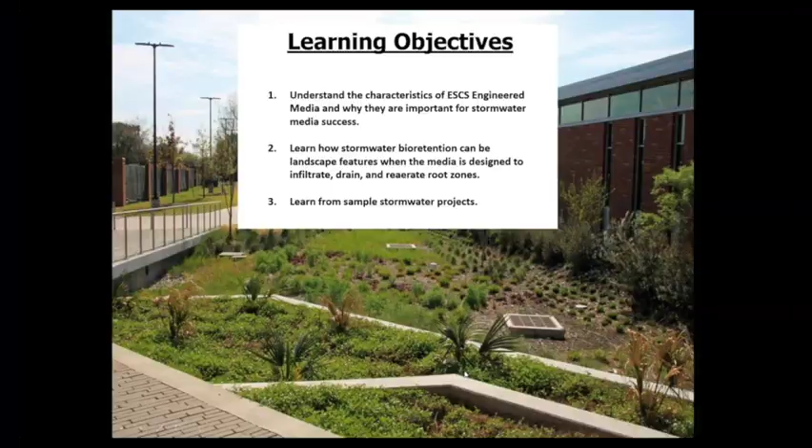The EPA is promoting green infrastructure as a cost-effective, resilient approach to managing wet weather impacts that provide many community benefits. While single-purpose gray stormwater infrastructure is designed to move urban stormwater away from the built environment, green infrastructure reduces and treats the stormwater at its source while delivering environmental, social, and economic benefits.

Stormwater is a major cause of water pollution in urban areas. When rain falls on our roofs, streets, and parking areas, the water doesn't soak in as it should. Stormwater drains through gutters, storm sewers, and other engineered collection systems and is discharged into nearby water bodies. The stormwater runoff carries trash, bacteria, heavy metals, and a litany of other pollutants.

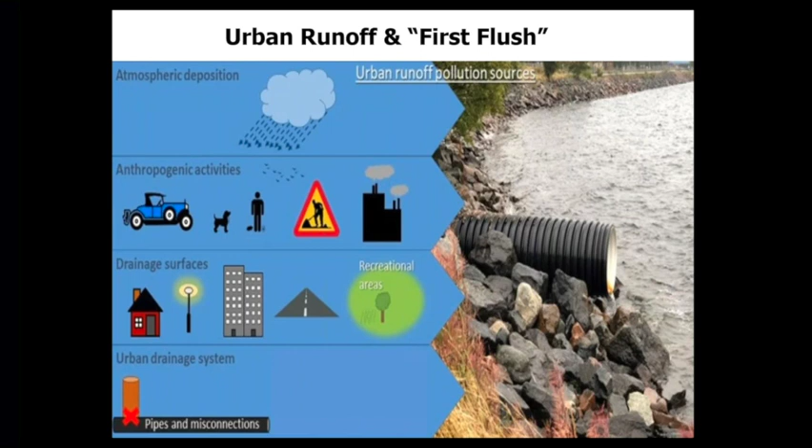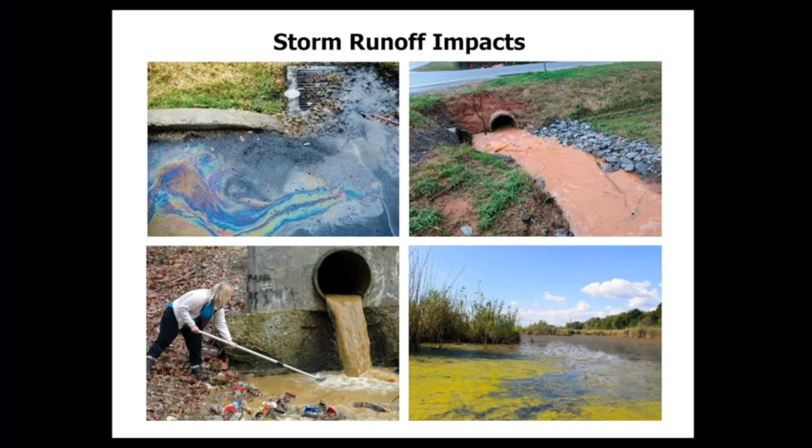Also, higher flows resulting from heavy rains can cause erosion and flooding in urban streams, which can damage the habitat, property, or even the infrastructure itself. So green infrastructure uses vegetation, soils, and other elements and practices to manage water and create healthier urban environments.

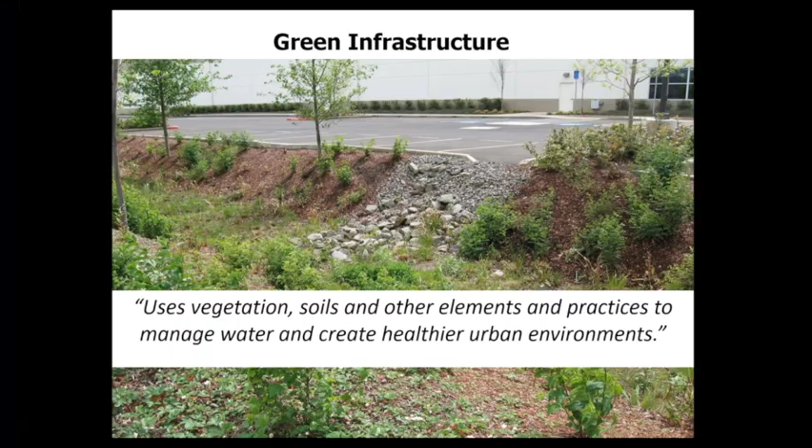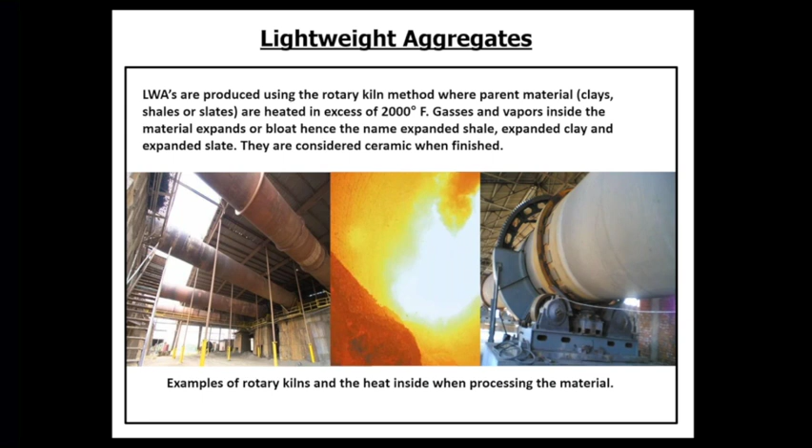Lightweight aggregates are produced using the rotary kiln method, where clay, shale, and slate are heated at high temperatures. At those temperatures, gases and vapors inside the material cause it to expand or bloat, hence the name expanded shale, clay, or slate. You can see from the pictures a couple of examples of the rotary kilns used in the process, as well as a look inside the kiln when the material is red hot and heated.

The common gradations for the lightweight ESCS material are fines, which include the different sand sizes, the 3/8 or pea gravel sized material, and 3/4 inch coarse or gravel sized material. Other material sizes are available depending on the location and the manufacturer.

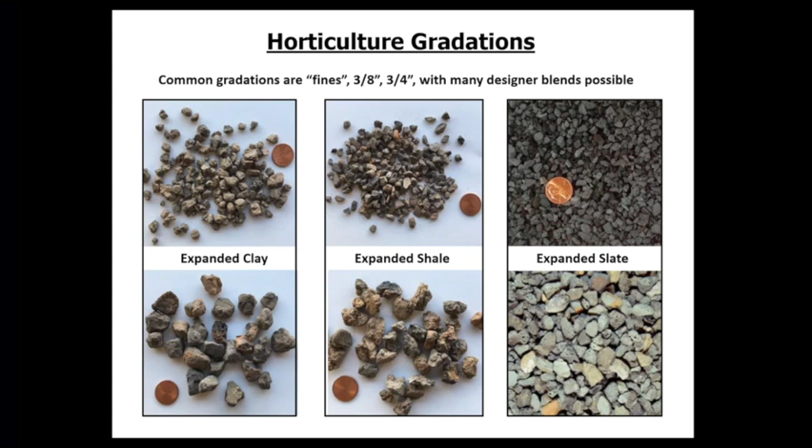As we look at the total manufacturing process, you can see that essentially the raw material is mined, sized to be fed into the kiln, heated at high temperatures, cooled, screened and sized to industry specifications, and then shipped to customers and projects throughout the country.

You can also look at the heating process from the fuel source, airflow through the kiln, and the air quality control that's in place to meet air quality standards. This entire process is constantly monitored and tightly controlled to ensure quality and consistency.

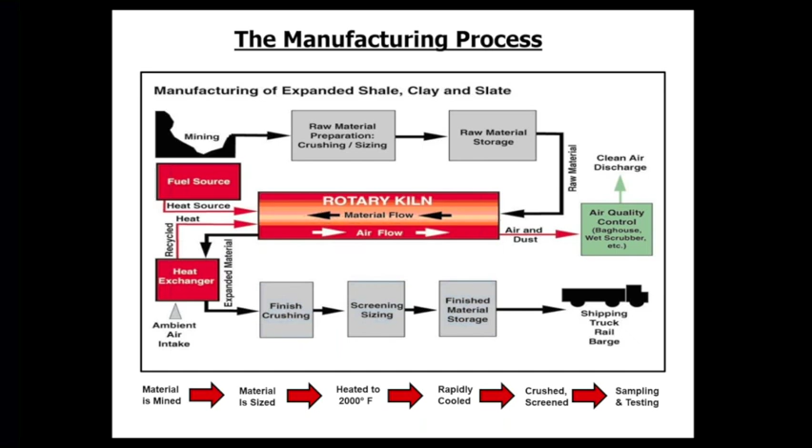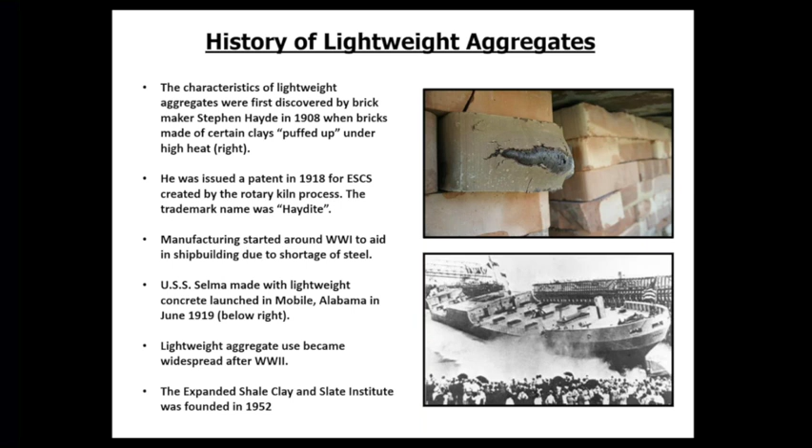Lightweight aggregate use became widespread after World War II, and the Expanded Shale, Clay, and Slate Institute was founded in 1952.

Here's a couple of illustrations of early uses of lightweight expanded shale, clay, and slate in concrete-related applications. This is a World War II concrete ship passing under the Oakland Bay Bridge. Both the ship and the bridge had lightweight concrete.

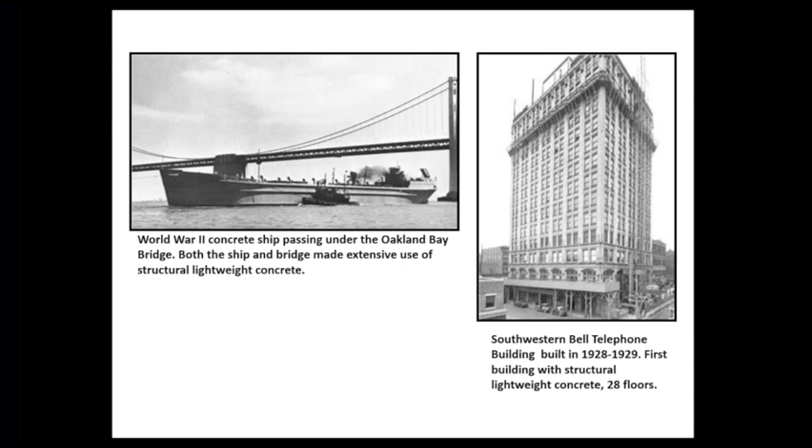On the right is the Southwestern Bell telephone building built in 1928. The first building with structural lightweight concrete, which consisted of 28 floors.

Today, lightweight expanded shale aggregate ESCS materials are available throughout the United States, with producers being able to service the entire United States as well as into Canada.

Lightweight ESCS material is all around us, from the roads that we drive on through construction and maintenance of those roads, as well as geotechnical fields, sports fields and other parks, horticulture, hydroponics, aquaponics. It's all around us in our structural lightweight concrete high-rise buildings and bridge decks, lightweight block, other masonry units, stone veneers, and a litany of other applications, including stormwater, as we're addressing today.

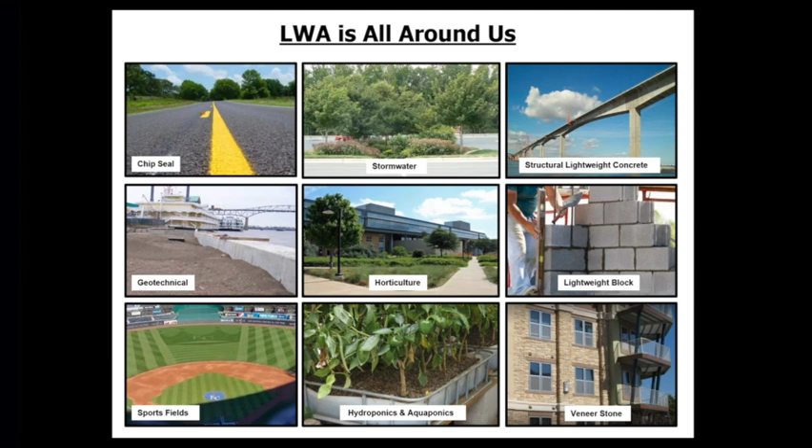Some of the benefits of the material with regards to stormwater: one key thing is it's light in weight, about half the weight of normal rock, sand, or topsoil. It's porous, which is important to add porosity to the soil, helps balance the air and water in the soil profile. It's also important for the microbial activity it helps promote and sustain with the management of stormwater and treatment. It's structurally stable and strong.

The angular particles will interlock. The gradation is set such that it won't break down. It doesn't degrade—even in harsh weather conditions, it's going to remain intact. The material can absorb and desorb nutrients and water as plants need them. It can be very high draining, and those drainage rates can be adjusted to meet the needs of a project or a stormwater application.

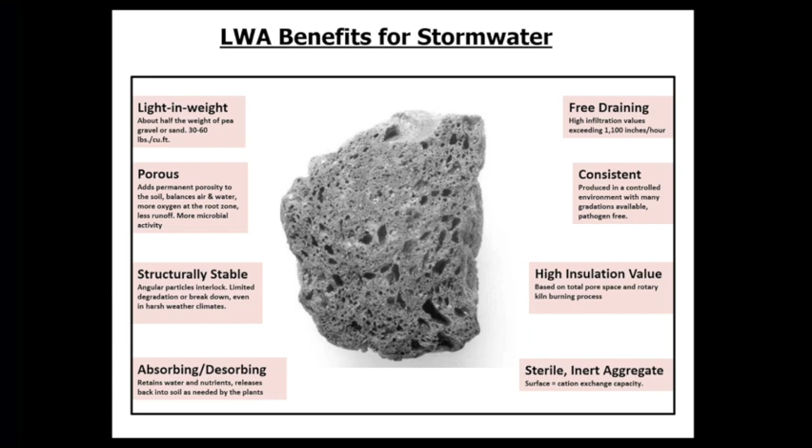Most importantly, as we mentioned in the production process, it's consistent, produced in a controlled environment, pathogen-free, weed-free, and clean. It also gives us a high insulation value, which is important in moderating soil temperatures and maintaining the porosity of the material itself. Finally, it's sterile and inert—weed-free, chemical-free—and it has a high cation exchange capacity, meaning it'll be very beneficial in exchanging ions in the soil and holding on to nutrients.

This is a close-up of the porosity of the particle on the material. You can see the network of pores throughout, which is important for the absorption and desorption of water and nutrients, and also to maintain beneficial microbial activity and provide a place for those microbes to live. This illustration shows the higher porosity associated with ESCS materials as compared to traditional aggregates that have a lot less porosity.

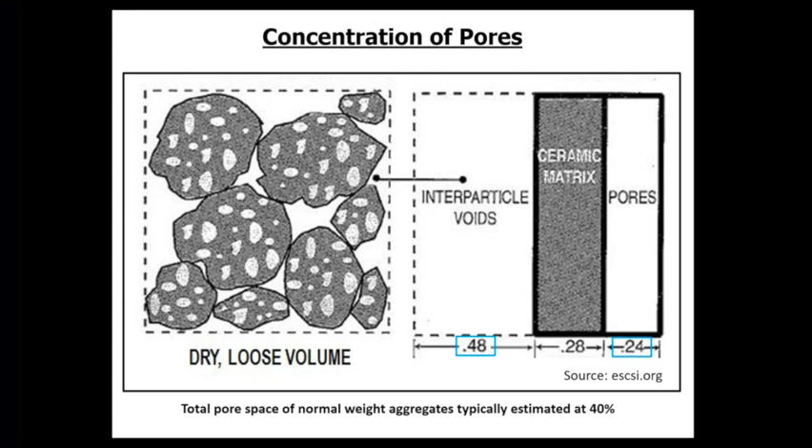So why do the materials work? They have a long history—they've proven themselves in use in rooftop gardens for many years now, which are some of the harshest environments and intense projects where it can be used. They hold on to moisture and nutrients and absorb and desorb those nutrients as needed by the plants. They hold water longer than sand and provide soil temperature moderation, which can be important in areas of high heat or extreme cold temperatures.

And with that, I'm going to turn it over to Eric Nelson with Arcosa, who is going to go over some additional properties as well as get into a couple of projects using these materials.

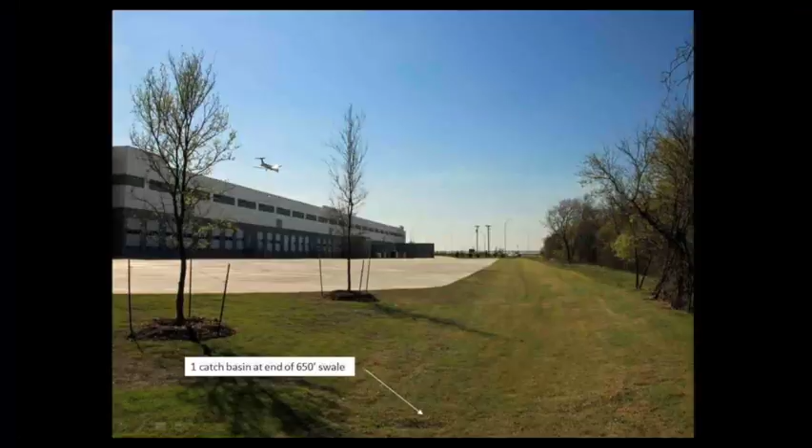So starting off, basically what we learned in soil science class: we have three different particle sizes, beginning with sand, silt, and clay. Sand is the largest of all particles. It drains very well, it does not compact, and it holds water, but not for a very long time.

On the extreme end, you have clay, which is a detriment to stormwater because it compacts very easily. There's a lot of surface runoff, very low permeability. The good thing about clay is it does hold water for a long period of time. It also dries out very fast and cakes up.

So if you were looking at expanded shale, clay, or slate in comparison to sand or clay, it basically falls in the middle. It drains very fast, high permeability, and holds water longer than sand. There's a lot of void spaces for the water to penetrate, and it does not compact.

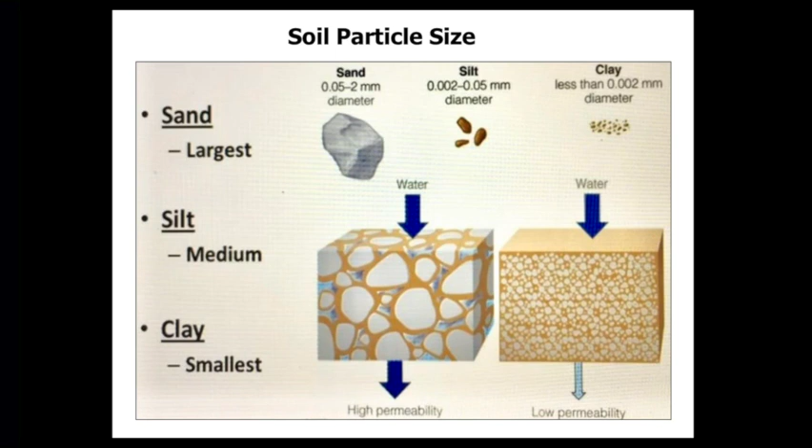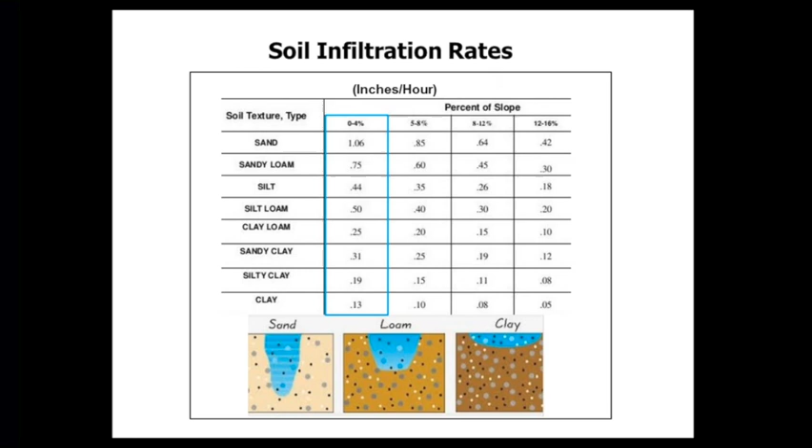Looking at this table, sand drains at over 1 inch an hour. At the lower extreme, you have clay, which drains at a little over 1/10 of an inch an hour. From the diagrams below, you can see sand is basically a vertical column of water penetrating the soil. Loam is evenly distributed, and clay basically sits at that top layer, spreads out, and evaporates pretty quickly into the atmosphere.

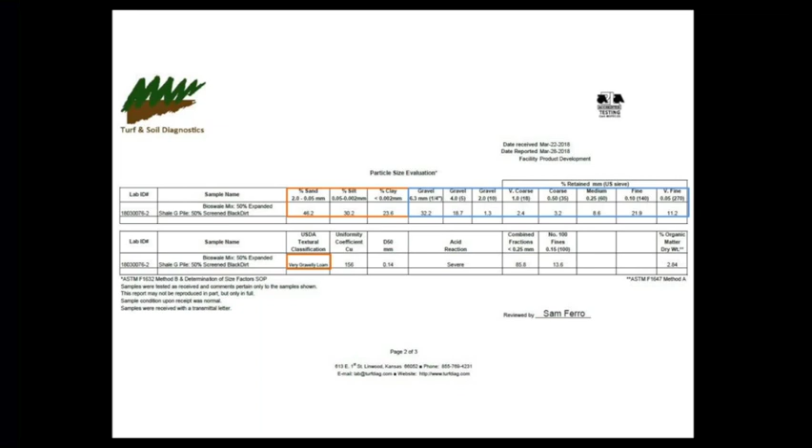The infiltration rate of that was 24.8 inches an hour, compacted to 5.75 foot-pounds per square inch. If you wanted to modify that to get a higher flow or reduce flow, it's a simple equation of using more lightweight or a finer gradation of lightweight in conjunction with sand or compost.

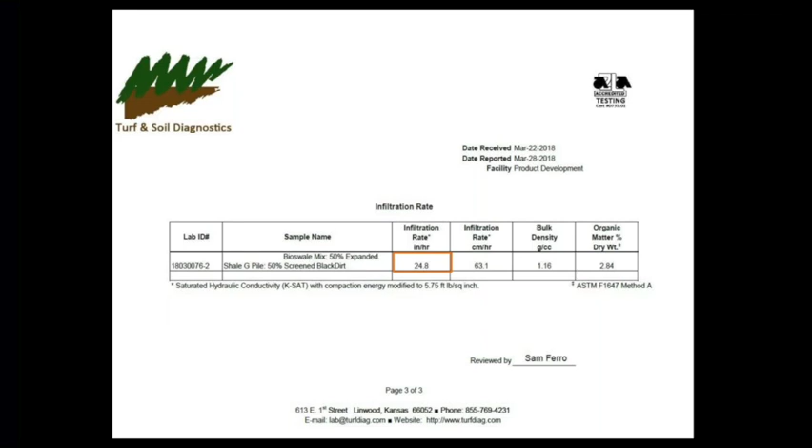Basically, we look to mimic forest soils where they have more avenues for air and water. Urban soils are easily compacted from pedestrian foot traffic, machine compaction. There's a history of construction debris underground. It really limits the air and water infiltration into the soil.

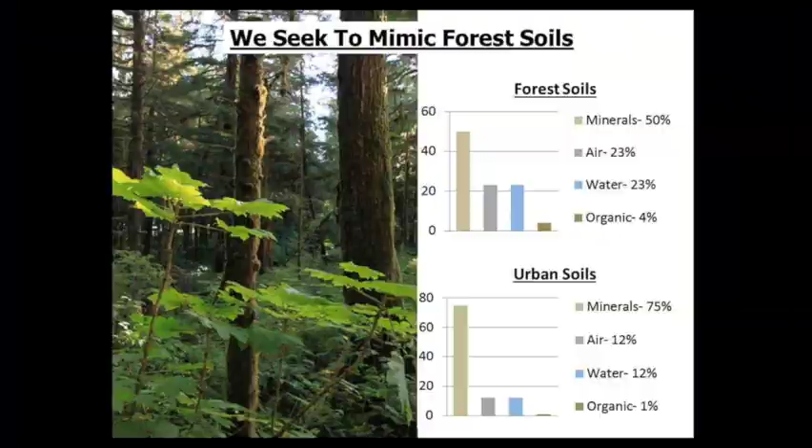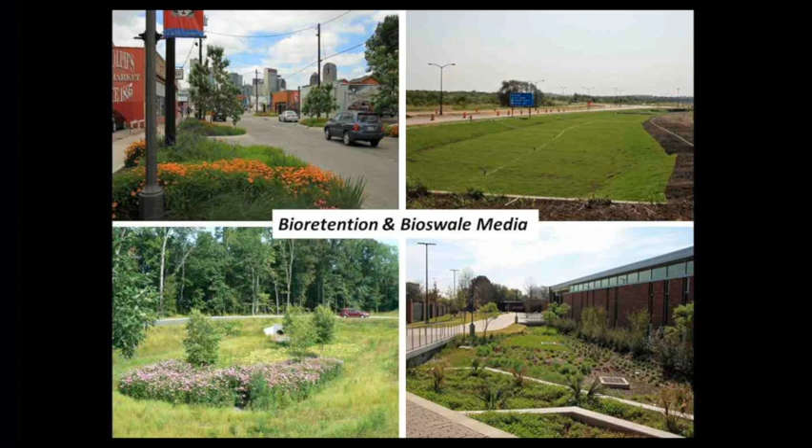So in stormwater, we have basically bioretention and bioswale media. I'm going to talk about 6 projects that are in the DFW and Austin areas.

The first one here is the Green at College Park, University of Texas at Arlington. This was one of the first sites certified by the Sustainable Sites Initiative in 2012. It occupies 2.6 acres, including a gathering plaza, activity lawn, promenade, and water detention system, which is the main attraction for this site. It reduces stormwater runoff by 25% and filters 80% of the suspended solids.

You could see there the bioretention media design: 1 part compost, 1 part expanded shale, 1 part native soil, and 2 parts sand.

Looking at the overhead plan here, you start on the north side, the left side of the screen, where they designed a bioretention swale that runs along to this point, where it enters a filtration zone with horsetail reeds running along the avenue. It's basically 6 foot wide and 3.5 foot deep. It enters a bioretention system at this point.

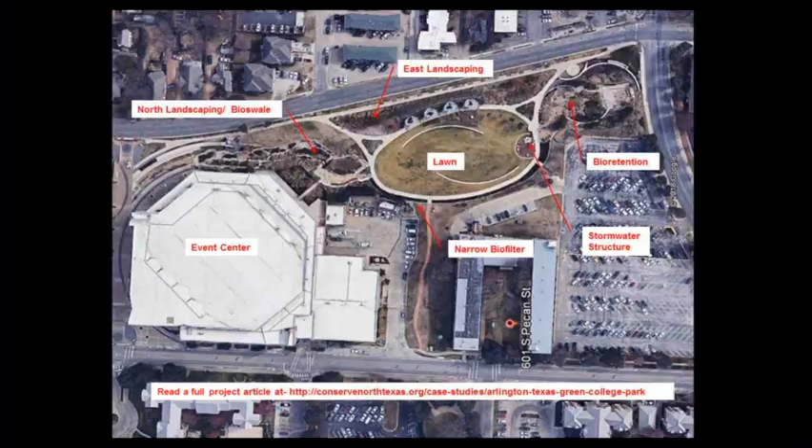So water is coming out of that structure in a big rain event. This is really unique because you're basically taking water out of a drainage system, reducing the runoff, delaying input into the drainage system, and improving water quality as it backs up under the lawn, the bioretention cell.

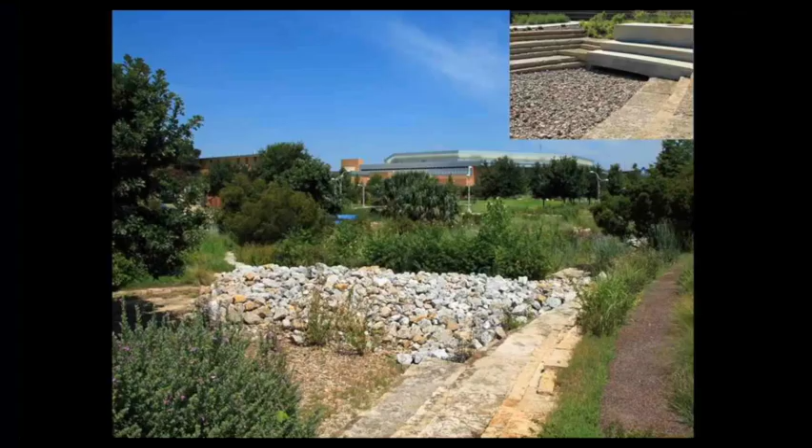Here's a check dam on the lower southern end. The water does back up about 2.5 feet in the bioretention cell in a big rain event, but before it enters the drainage system as shown in the upper right-hand corner.

The problem they were having with this project was runoff from the uplands residential area. There were 3 culverts underneath the road parkway in 3 separate spots. So you had a lot of nitrogen and phosphorus runoff basically sheet flowing across the parkway into the Shoal Creek area, as identified in blue. What the designers did was use opportunities in the tree clearings to basically swale out some areas and create detention basins using expanded shale and compost tilled into the soil to slow that water down and catch it.

In between the 2 biocells, you have a series of check dams. There's a swale there, and again, the main purpose is to slow down that runoff and cleanse it on its way down before it enters the creek.

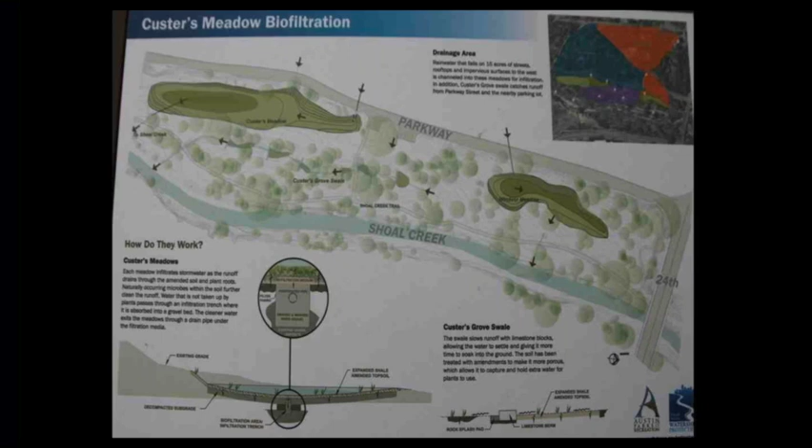Here shows some signage along the trail system, educating people about what they're doing along the project site. In the lower bottom of the slide, you can see where the water is allowed to pool into those areas. Again, because this is a passive park, nobody's using it at that point in time during a big rain event. But this does a good job of capturing the first flush of pollutants.

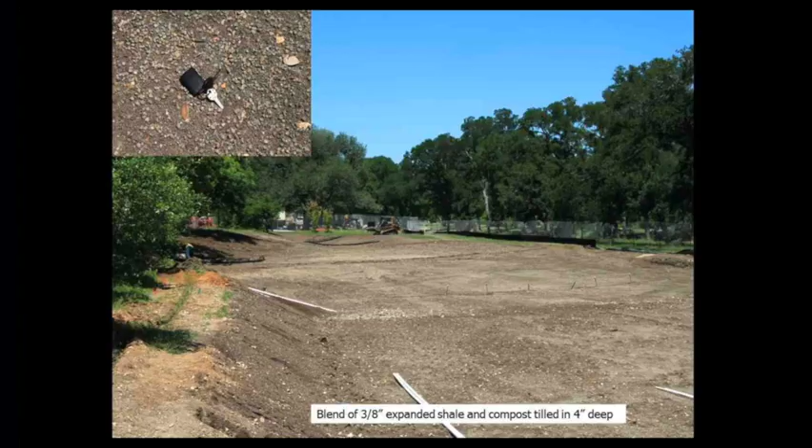Here you can see one of the areas. This was amended with 3/8 inch expanded shale and compost. Upper left-hand corner is a picture of the mix going in. They did use temporary irrigation to get the turf up. It didn't take very long because the moisture holding capacity of the lightweight aggregate and the compost did a good job of getting that turf up and running.

This was a project done southeast of Dallas along Deep Ellum. This happens to be an area with a lot of restaurants, bars, nightclubs, and shops. This is a multi-block beautification effort by a firm in Dallas, K. Cook and Associates. The design of this bioretention system was done by Dr. Fouad Jaber with Texas AgriLife.

Basically, this system is comprised of 50% plant-based compost, 25% expanded shale, 25% native soil. That tends to drain approximately 50 inches an hour. Beneath that, you have a 12-inch retention zone made up of pea gravel. So in a big rain event, you're getting good drainage through the detention filtration zone. It's allowed to back up into that pea gravel until it reaches that perforated pipe and goes out.

That bioretention mix will stay moist for a long period of time, especially at the lower zones of that, and it provides a deep rooting bed for trees and plants.

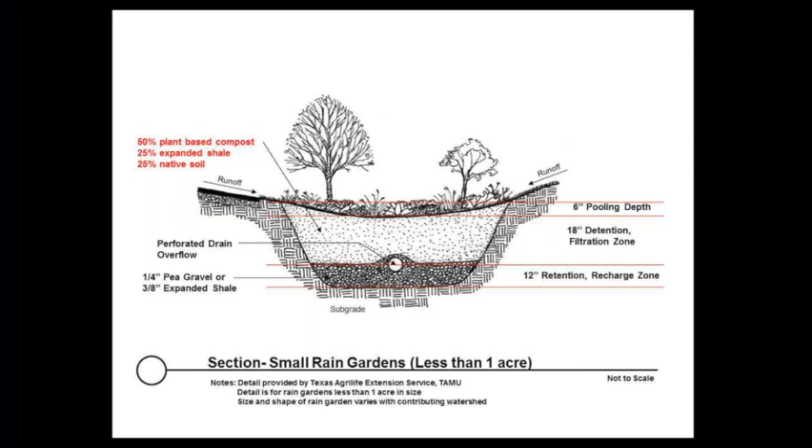Lindsay White, who was a landscape designer on the project, I have to give a shout out to her. She did an excellent job with a presentation online that you could access called Soils, LID, and LAs. It does a very good job of talking about the project and the process.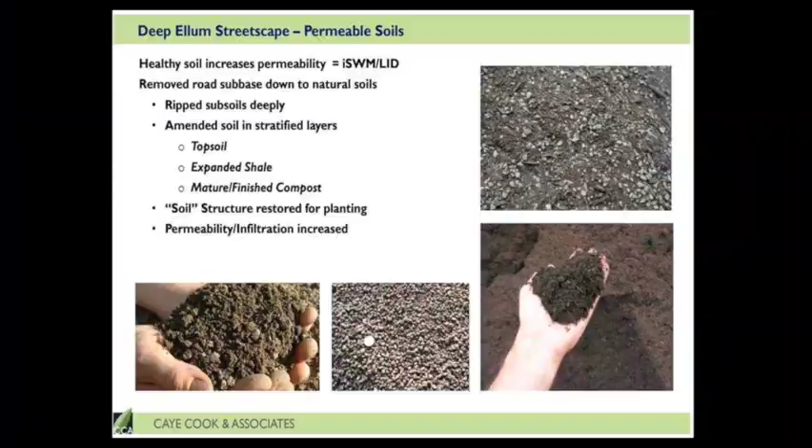So this is a project at DFW Airport Logistics Center. There's a lot of pavement on the project, a lot of sheet flow runoff. The designers on this chose to basically do a blend of 3/8 inch expanded shale and sandy clay. This was installed at a 6-inch depth. If you go back to your rational formula, you know that you're basically improving your coefficient of runoff with a higher permeability of this bioswale mix.

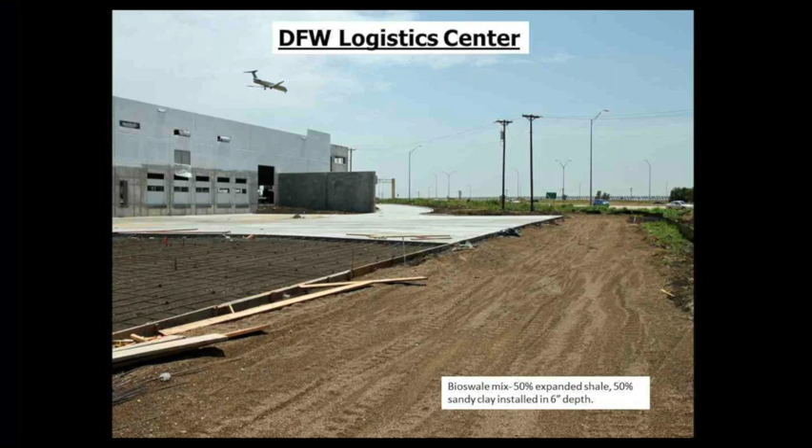This is something that could be blended on site as long as you have a clean work surface to do it. It's basically volumetric blending, 1 by 1. This is a shot finished afterwards.

This is basically a 650-foot long swale in one direction. It goes off to the left side of the screen here, another 200 foot. And as you can tell, there's only one catch basin that basically collects this water before it is drained to the outlet structure.

AT&T Stadium, this is a dual purpose use, overflow parking and also infiltration media. This was designed back in 2009. It's still up and running today, functioning very well. The designers on this were trying to protect Johnson Creek, which is off to the right side of the screen in blue. You can imagine all the greases, oils, hydrocarbons, and crumb rubber washing all over this expensive pavement. They had to do something to slow that down.

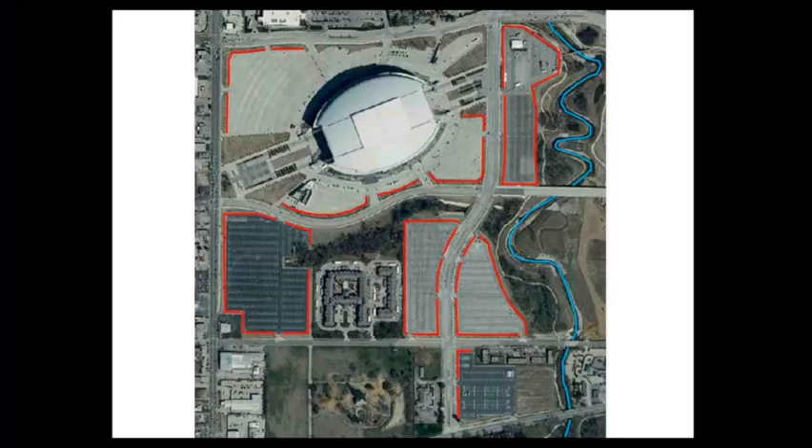These strips in red were basically 20 foot wide to allow for vehicle parking. The design of this included a prepared subgrade. There's a thin geogrid at the very bottom, a 6-inch infiltration media compacted. We like to see a sand backed grass sod on top because it doubles the infiltration rate over a clay backed sod.

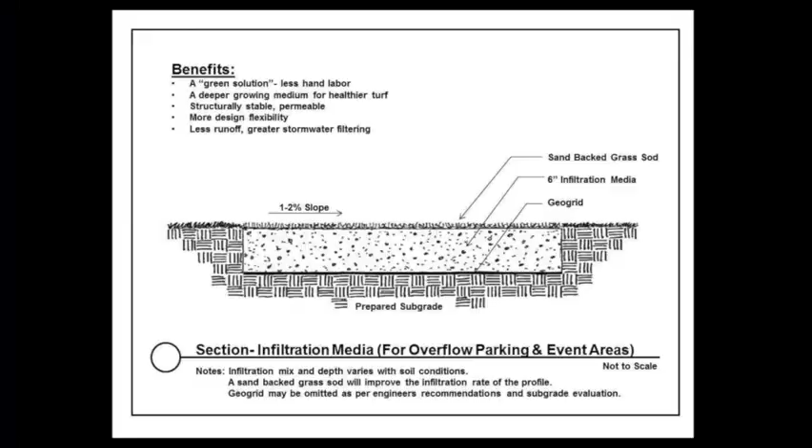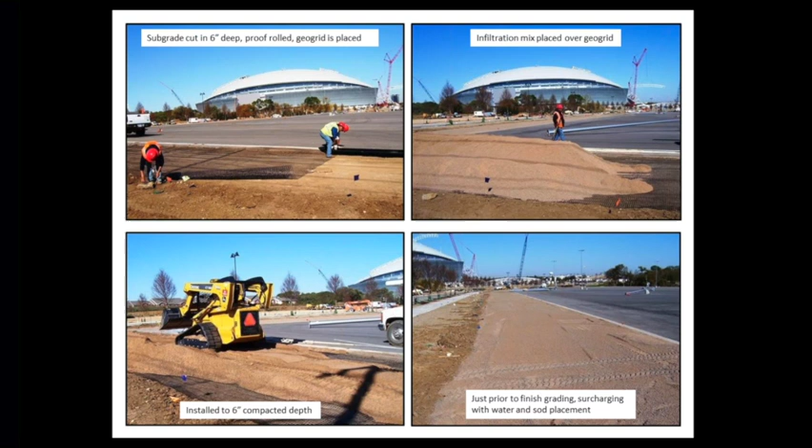Pretty simple installation. Here you can see it, work in progress. They roll out the geogrid, the mix is placed on top of it, it's tracked in place and compacted. Just prior to sodding, you want to charge that media fully with water. It's not done here in that slide, but that is an important step because of the quick drainage of this media.

You can tell it can take any type of vehicle parking on it. This mix was tested in the lab, basically 20.4 inches an hour, compacted at 7.5 pounds per square inch.

These parking areas during games or events get striped in paint, so you're paying for this spot. These green areas fill up quickest among all the parking areas on campus because people like to tailgate in grass where it's cooler, more comfortable.

They do have catch basins along some of these areas to trap water in big rain events, and they did have filters on it, catch basins, to further control the runoff before it entered that Johnson Creek system.

The last project I'll show you here is at DFW Airport. We've done a number of jobs there. As you know, airport grounds, some of the sites there, if they are holding water, they're going to be attractive to birds, and birds and wildlife do not go well with planes taking off.

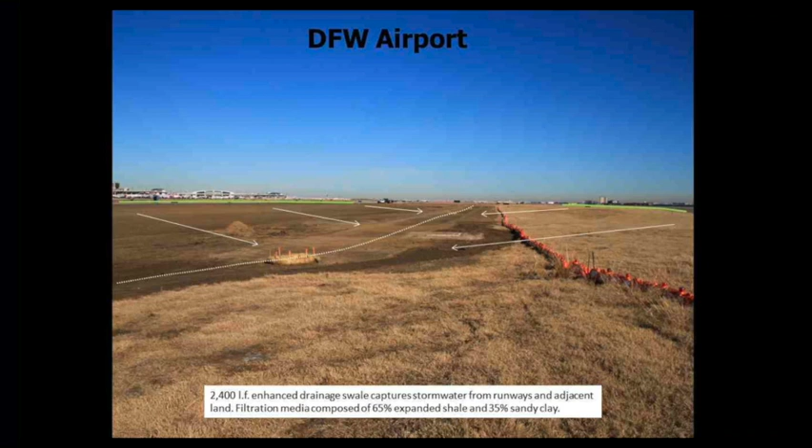This is an enhanced swale between two active runways where you're getting a lot of runoff from the adjacent areas. This is basically the same mix, 65% expanded shale, 35% sandy clay.

The architects here chose to use 6 inches of pea gravel wrapped in filter fabric, which sometimes I just see at the very bottom rather than on both sides of the pea gravel layer. There's 3 perforated pipes at the bottom, and there's 8 inches of this infiltration media.

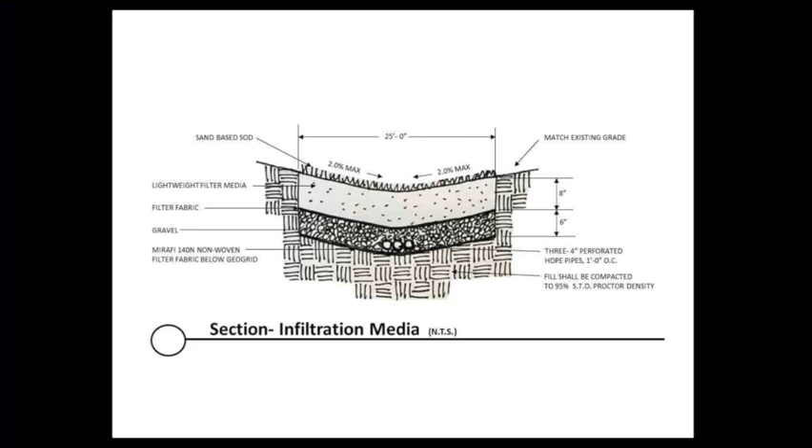We are actually going in some designs where we're using our finer gradation of expanded shale in that bottom layer, substituting that 8-inch layer of infiltration media with 4 inches of lightweight infiltration media, basically solving the same issue.

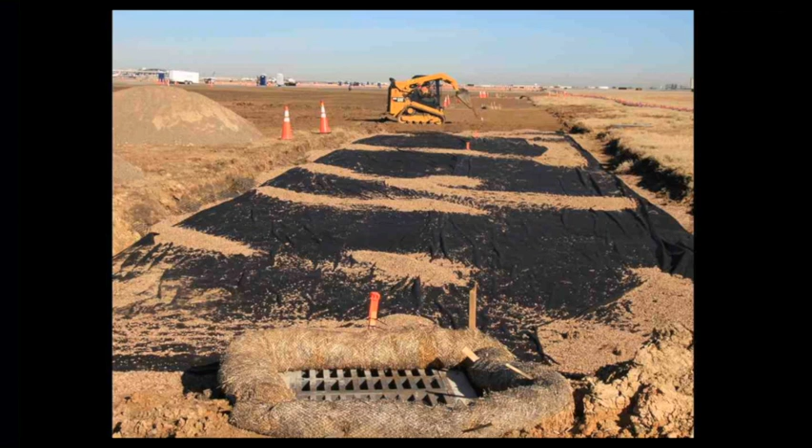This is a shot of it going in with the fabric on top of the pea gravel, the mounds of lightweight aggregate mix to the right. This is being placed in from the sides. Once that tractor is done, it's pretty well in place.

They do have catch basins on this, capturing runoff every about 400 foot. This media was placed as is, and you can tell the moisture in the media by the darker color where the swale is at.

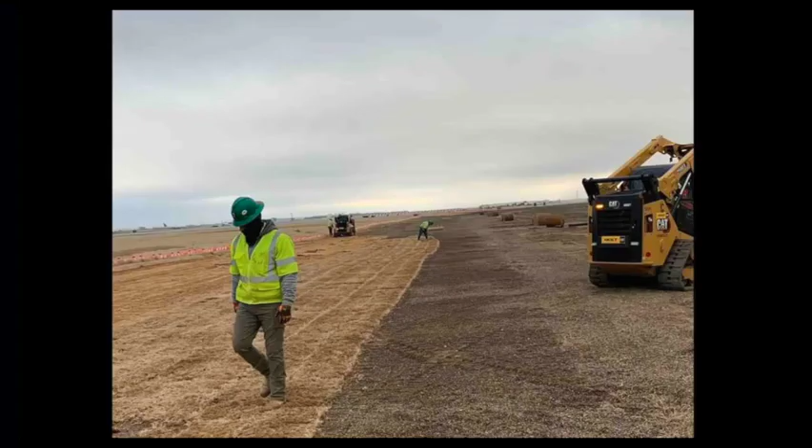This is during laying the sod, and you can tell again the moisture holding capability of the expanded shale and sandy clay loam. It's holding water. You can visibly see that line on the edge of the swale there where it's been watered as far as the eye can see.

That concludes this section of projects in Texas, and I will turn it over to Chuck Friedrich. We'll talk about projects in North Carolina.

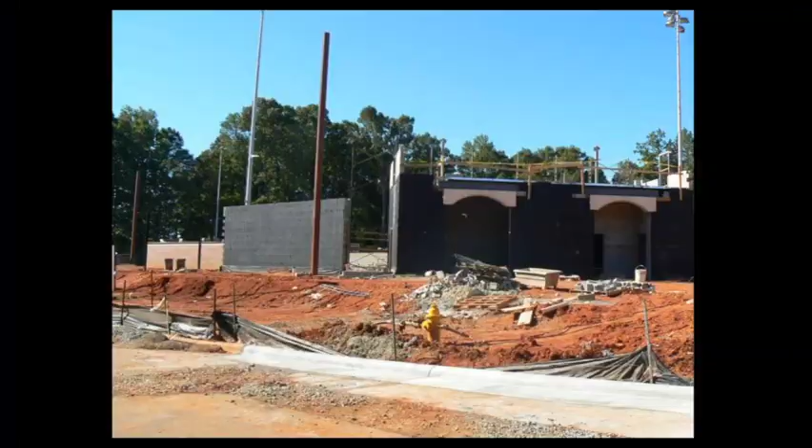Most states have a different criteria for bioretention media. They have a guideline, sort of like their voting rules and regulations. It's the same thing pretty much with bioretention. It's across the board. Every state is different.

We're looking at North Carolina here, which started out as just a sand mix with organic, and they didn't really qualify the sand. Other bioretention medias around the country refer to a topsoil. Well, what is a topsoil? It could be anything, and they don't necessarily break that down as a sandy loam or a sandy clay loam or anything like that. So it confuses a lot of people when they install these.

And the ones that fail, what do they have as a defense? They don't, because it's all based on infiltration. So it's better to actually give you an advanced gradation on infiltration rates on what to expect in these medias.

So in the state of North Carolina, they refer to an ASTM coarse to medium wash sand or equivalent. Well, what's the equivalent to ASTM C33? It's a concrete sand. The only other equivalent would be an AASHTO spec, which again is the same thing.

So fortunately, ASTM C330 includes lightweight aggregate, and we were able to have North Carolina put in a lightweight aggregate opportunity for making a media mix. And we were able to match up a C33 coarse to medium.

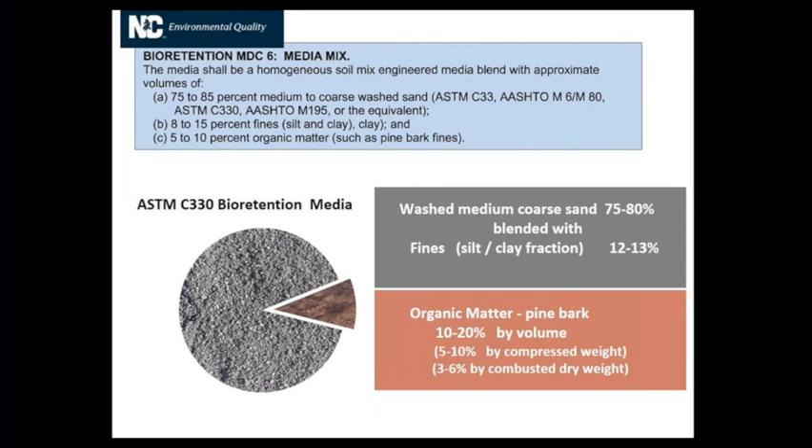So they require testing. They want you to test almost every batch, but they've gotten away from that when you're working with a consistent company.

The silt and clay content can be reduced because ESCS has a cation exchange capacity, most above 12, which will retain phosphorus and nitrogen in the media. The sand, silt, and clay content would match what they're asking for, but fortunately we don't have to add clay or silt to the media because we'll have fine particles, probably around 11%, which will fill that clay and silt content. That's an advantage because it's not something that'll break down or cause clogging. So there are advantages to the C330 specification.

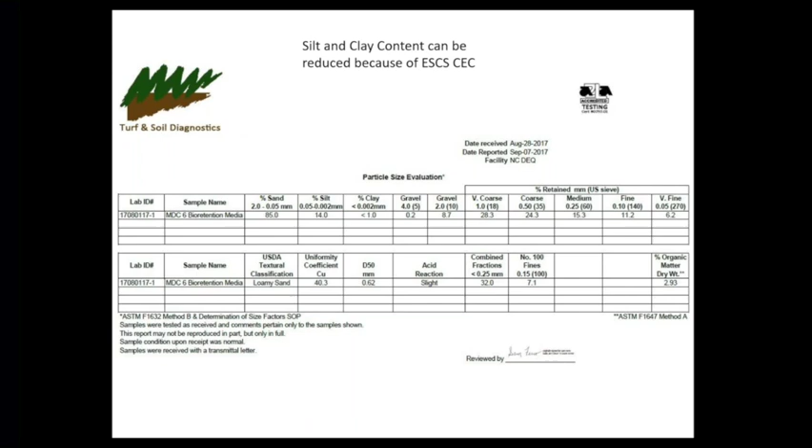And this comes out as a loamy sand when you get an equivalent for a native soil. The other thing that's real important is the infiltration rates.

Over time, these things will compact on their own—vibration, rain, foot traffic, maintenance. So you want to start with a higher number because it's going to reduce over time, especially when you have silts and fines washing into these cells. With a C330, you're going to get about a 16 to 21 inch per hour infiltration rate. Originally in North Carolina, they wanted that to start out at 2 inches per hour, and over time these things would slow down to almost nothing. So they've increased that to having a positive infiltration rate of more than 1 inch per hour, meaning you can go as high as you want.

The problem with that is if you're just using a sand blend, you have to have at least a 24 to 48 hour retention time to denitrify the effluent coming in, to try to reduce that nitrogen through simple evaporation in the air. The other thing is phosphorus—you're going to have some amount of iron or aluminum within that sand to have that retention. Fortunately with ESCS, we're going to remove or retain 98% of that phosphorus from the effluent, even without plants. So it has a real positive advantage there.

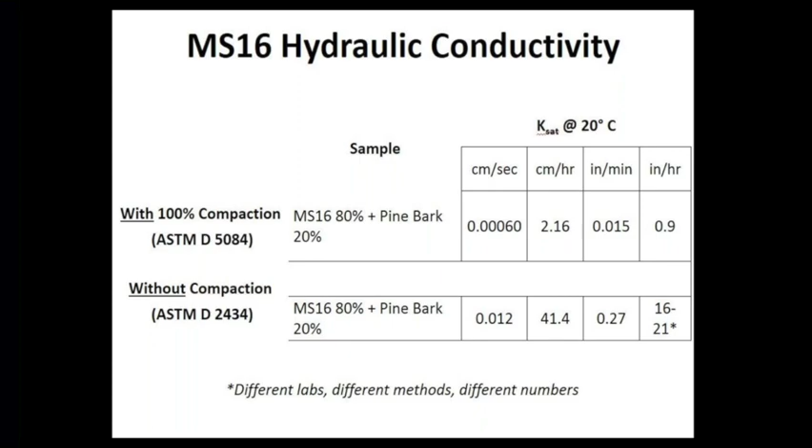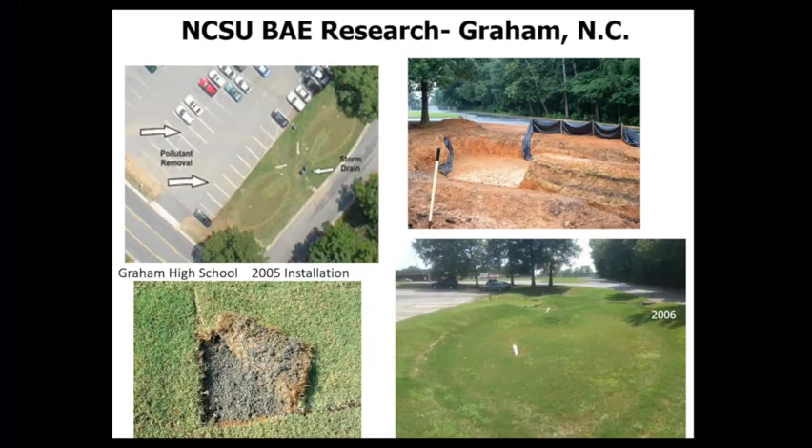And they just used Bermuda turf on top. We also like to work with the College of Design, with landscape architects, to develop and design these on campus. This particular one won an award—it's called the Artist's Backyard Owen Storm Refuge. It's between two dormitories and takes all the water off the rooftops, parking areas, and hardscapes.

They were also able to experiment with different types of plants to see which ones function better in wet and dry conditions, because when it rains these things are flowing water, and when it's very dry they're not irrigated, so the plants have to survive. The benefit of an ESCS size particle is the aeration allows the roots to go as deep as the profile, and the deeper the roots, the healthier the plants.

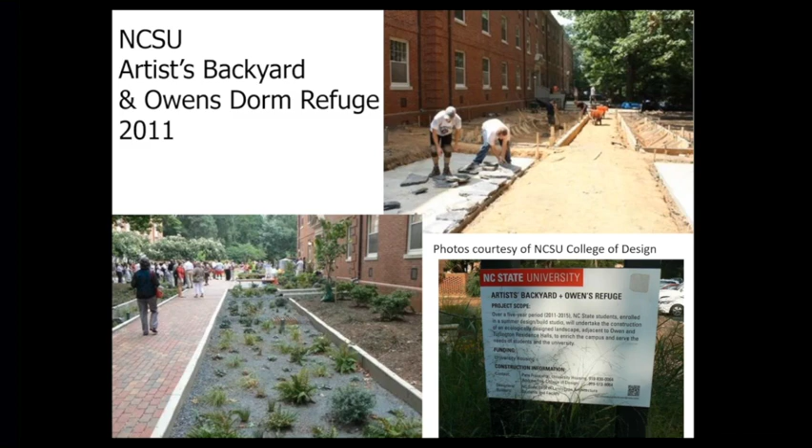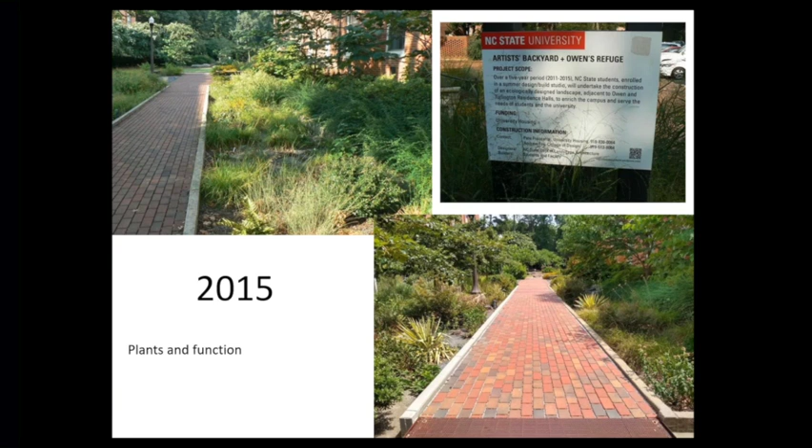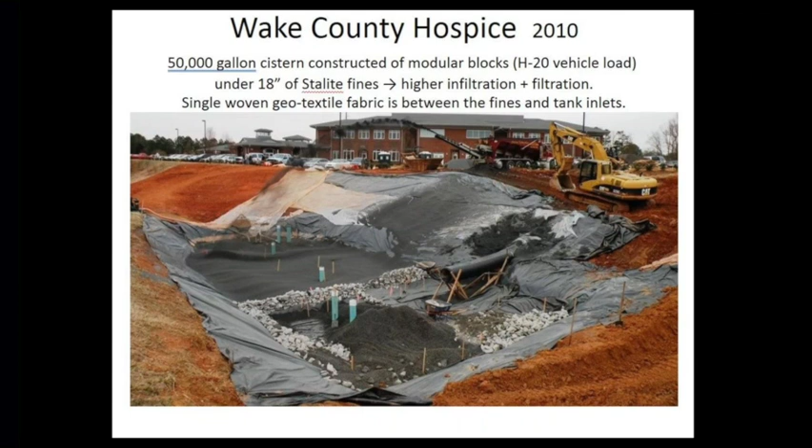Another thing we looked into with the state of North Carolina—this particular job is a hospice in Cary, North Carolina, near NC State grounds. What they're doing is collecting the water in a 50,000-gallon cistern and reusing it to irrigate during dry periods around the grounds of this property. So they lined it with filter fabric, put a cistern underground, and put the media on top. Then they laid down a Bermuda grass sod.

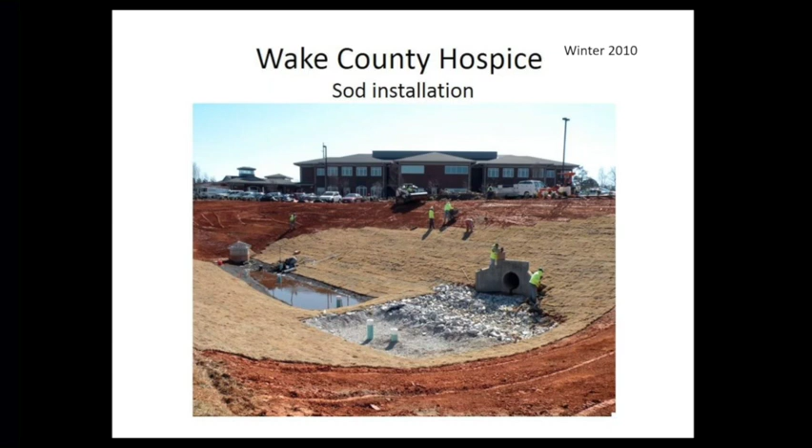This is wintertime, and that's what Bermuda grass looks like in the wintertime. You can see in the very center, that's where the water goes, and it's full right now. They had to draw that down to test the system, and the water came out crystal clear. We're removing a lot of the suspended solids from the site, and they were able to run this system right into the filters and through the irrigation without causing any issues.

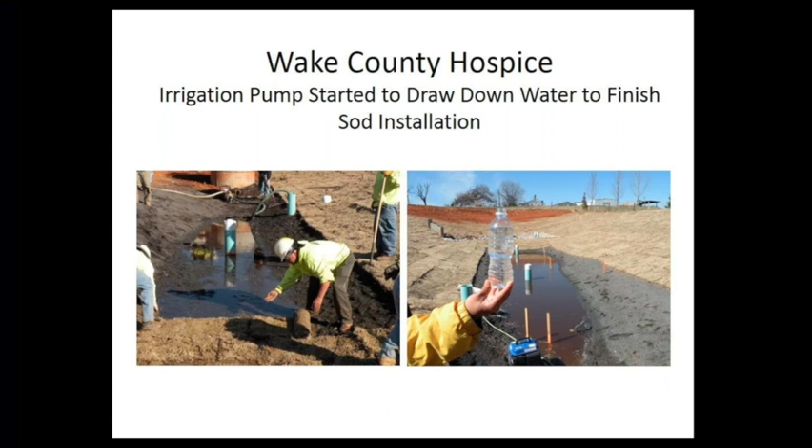This particular study was done with Mecklenburg County. This is a recycling center and collection area for refuse and trash and yard waste. So they did two systems: an ESCS system, a C330 mix, and a sand soil mix.

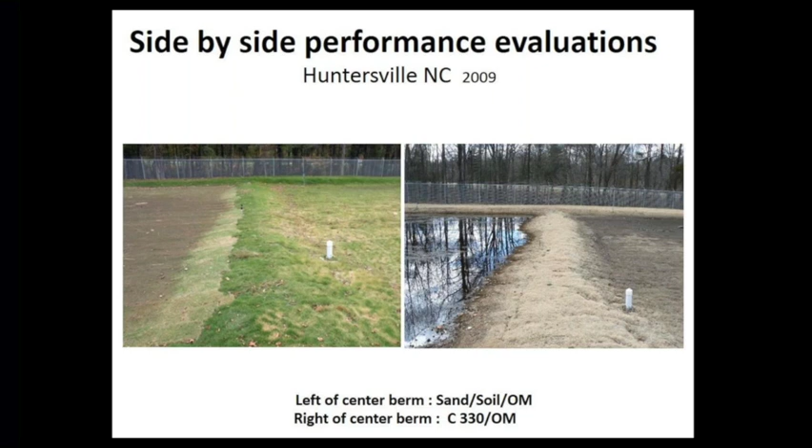You can see the green side is infiltrating, and the other side had that requirement for the 24-hour denitrification, so they want that water to stand. The difficulty was when you have heavy rain events and the water hasn't drawn down yet, it's going to overflow. And when it overflows, your oil and grease is going to go right back out the discharge into the creeks. So what they did here is they put in a forebay to collect all the sediment. What was happening is when it rained, and then another rain event, it flushed all those solids back onto the grass and clogged the whole system.

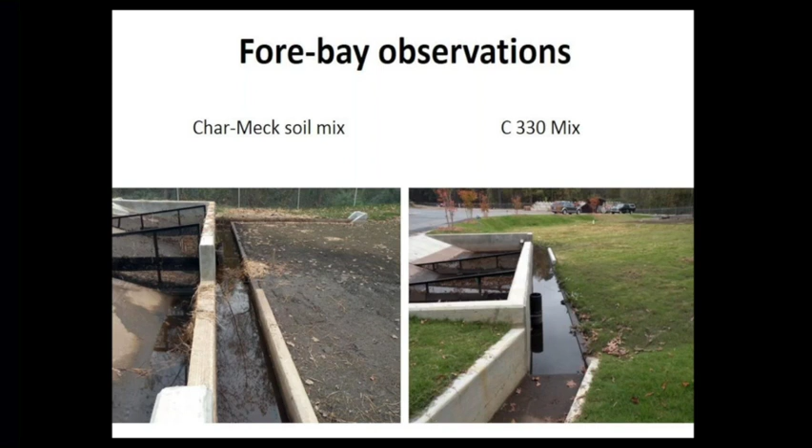Whereas in the C330 mix, which is an expanded slate blend, it drained quickly, and the water is contained within the system, so you had internal storage. You didn't have to deal with that surface water for denitrification to happen within the system. We were removing 75% of the nitrogen at the site, and as you can see from the discharge point, we again removed all those suspended solids as well.

The difference with sand and ESCS is the angularity. Because expanded aggregates are angular, they're trapping a lot of these sediments that normally would flow right through sand, because sand is more rounded or cubular.

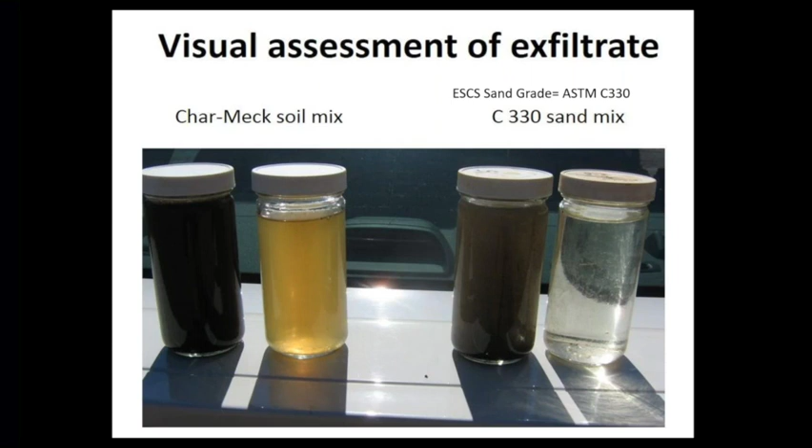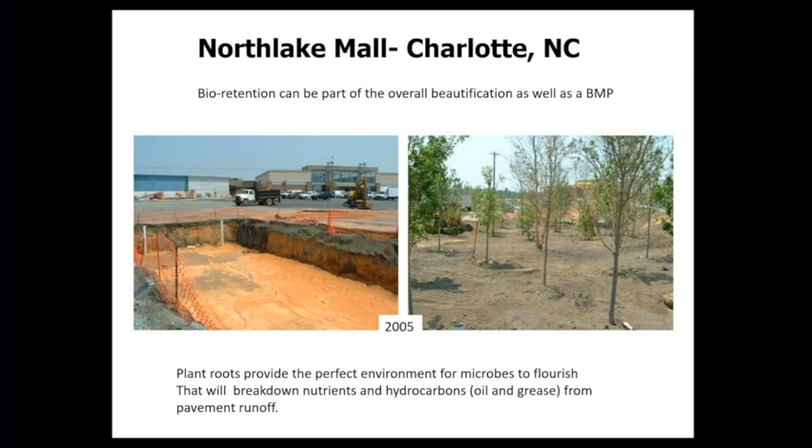The plant roots provide a perfect environment for the microbes to flourish around these root systems to feed off the sugars. They expand and grow, and they really deal with the oil and grease off this parking lot, because these microbes eat that and dissolve it, and also the nutrients from the landscaping, and provide nutrients for the trees and the plants. So they feed each other. Without the plants, you're not going to have that microactivity, and you're not going to have that uptake of those nutrients. This particular site had an awful lot of these.

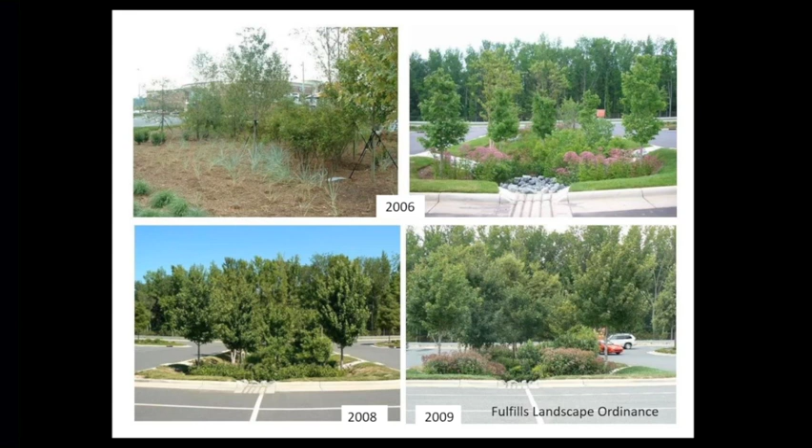The good thing about it is it's part of the landscape. It's not just an empty cell full of weeds behind the back 40, which no one can see, which there are an awful lot of those types of bioretention. They just find a place out back and put grass on top of it and let it go to weeds, and it functions fine, but it just looks terrible. Where in this case, you have landscape ordinances you have to deal with within a parking lot. You have to have a certain number of trees, you have to have a certain number of shrubs, and this way they perform two functions at the same time. They fulfill the landscaping needs, they're aesthetic, and they also deal with the runoff. So it's a win-win for this project.

You also deal with all the nutrients. Here it is in May 2009. We refer to these basically as a BMP, best management practice. Well, it does too, both aesthetically and functioning.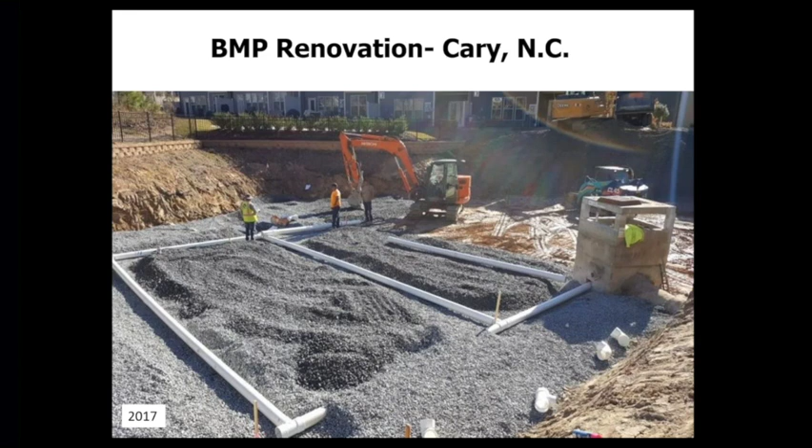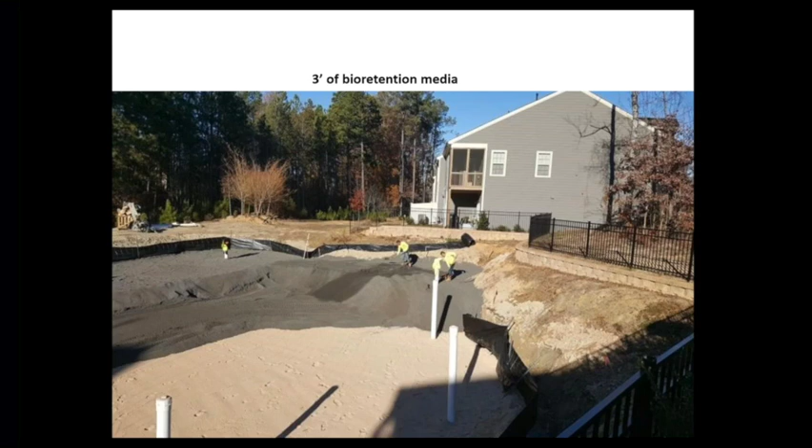And they just fill it with gravel, put the drainage in, use a choker sand instead of a filter fabric, learned a lesson on that, and then came in with the C330 expanded slate fines and organics, which was pine bark fines, aged pine bark fines.

They planted. The state also sometimes requires a triple hammered hardwood mulch, which helps with denitrification. In other words, the breakdown of the lignin in the mulch uses a lot of nitrogen.

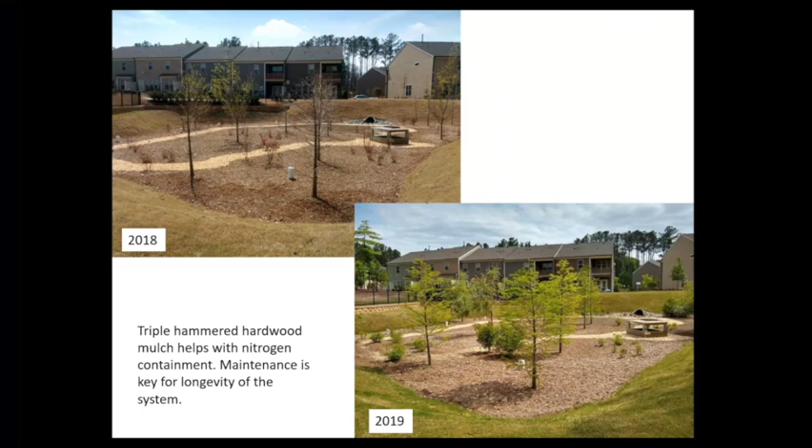The problem with this is you got to maintain that mulch. That mulch will eventually decompose and create a lot of slime underneath and can be impervious. So if you find these systems filling up with water and not leaving after 24 hours, just go in and remove the mulch and replace it, and you'll find it's working just fine after that. We've seen that happen before.

The Department of Transportation wants a higher infiltration rate. They do not want any standing water for fear of an accident. If a car rolls over into the water and somebody can't get out, it's upside down, they're going to drown in this mess. So they use filter fabric and a coarser ESCS to allow that water to infiltrate quicker, but it's still contained within the system.

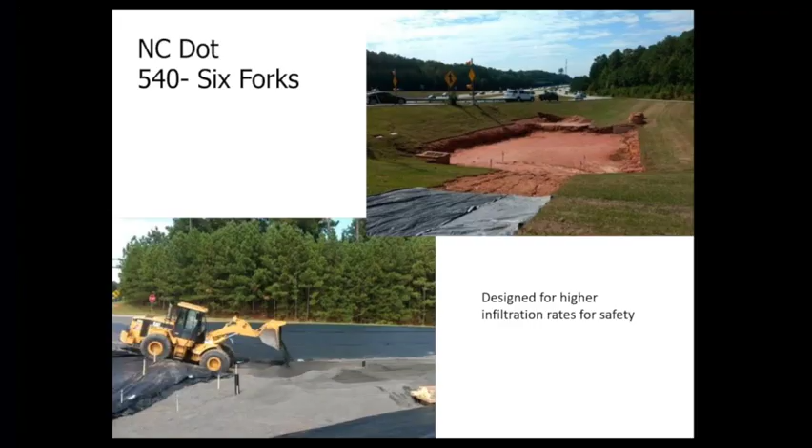And they do have their own environmental unit in North Carolina. So as long as they keep their nose clean, the State Department of Environmental Quality won't come down on them too hard. And here it is again, it's just a maintained lawn. They just mow it with the rest of the weeds and stuff that grow into it, and it's functioning just fine. And they do a lot of these around the interstates, especially in interchanges.

This is at Elon University in Elon, North Carolina. This was a problem place. They were developing a new softball complex, and they needed overflow parking for the football field across the street.

The problem was this job was not finished yet. They still had construction going on. And the key when you're doing a bioretention cell is to get all your erosion control in first, get your grasses planted, and then put this in last so it doesn't get contaminated.

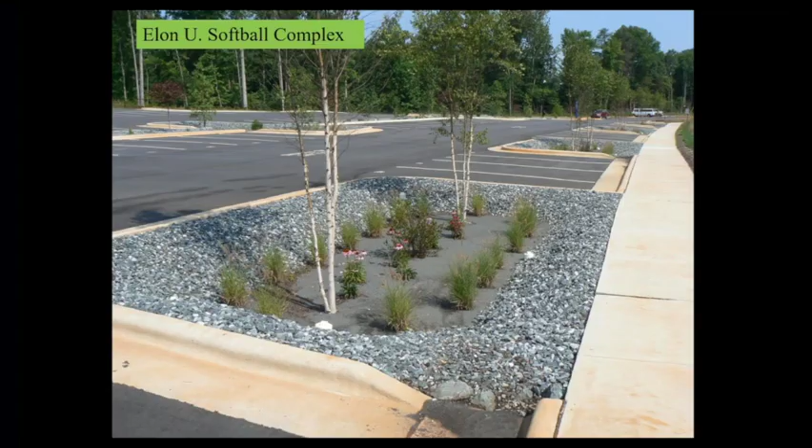So you can see they did everything correctly, put the plants in, have the media in there, but obviously the softball field is still being built. You can see all that red clay. Erosion control kind of failed a little bit. You had the parking lot coated with red clay silt, and they had to wash it off for the football parking, and it would go right into the bioretention cells.

Well, this is not a good thing. This is referred to as an erosion control breach contamination. The state normally would come in and make you take it all out, start all over again. In the case with this, you're dealing with that angularity I referred to earlier.

The particle shape traps the sediment on the surface, so it can be easily removed. You can just scrape a half inch to an inch to two inches off. And as you can see in the lower picture there, it peels right off and it's gray underneath. This material does not pass through that interlocking exchange of porosity and angles and void space that makes the stuff work.

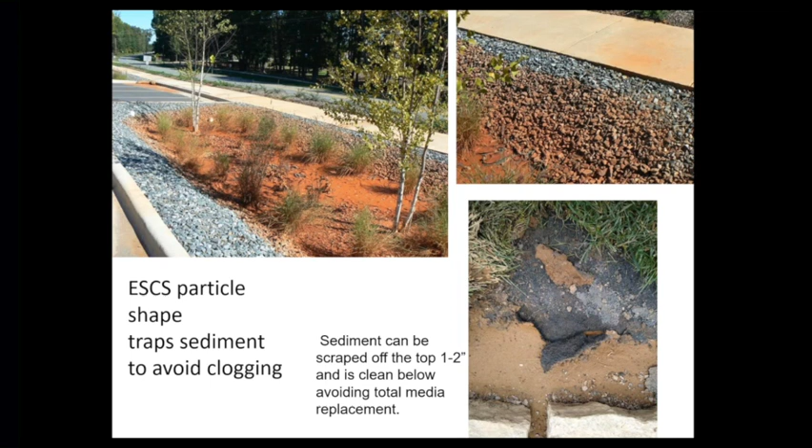In the upper corner, you can see how high the water got when it was sealed up by that silt. Normally they would make you take the whole thing apart, but in this case, the inspector looked and the contractor showed that underneath was perfectly clean. You can see that's only about a half inch of material that was contaminated.

So here it is in 2015, same plants, all doing fine, project finished, everybody happy.

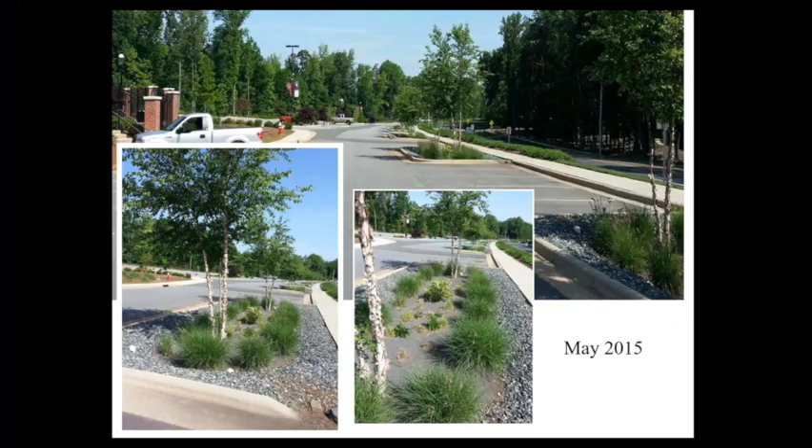So in conclusion on this part of the program, in review, the advantages of expanded shale, clay, and slate for bioretention media is the cation exchange is above 12 in most cases for nutrient retention. It is inert. It doesn't really affect the pH of the plants. It's not a buffer, so it'll start out at, say, 8.5, but when you add the pine bark fines, it'll drop back down to about 6 to 6.5 which is ideal for plant material.

A 7 pH is fine for turf. It's basically not a buffer, not a lime. Particle shape gives you a lot of surface area along with the voids. You have filtration capabilities for removing total suspended solids, as we saw with the bottles of clear water. We got water retention for internal storage, so you don't need to have that surface problem where if you get another rain event, that oil and grease floats right out. In this case, it's contained within the system.

We got porosity and voids for aeration, meaning deep roots. If there's air, roots will grow. If there's no air, if it's saturated or anaerobic, you will not have root systems down there. We have seen systems that flood and do not perk, and the root systems are in the very top 6 inches and can't grow any further down. In these cases, if it's 30 inches, we've got 30 inches of roots. Big deal for maintenance because you don't have to water it, and it's going to be durable. The product is durable. It does not break down, does not have to be replaced, doesn't fall apart, doesn't turn to muck. It's very lightweight.

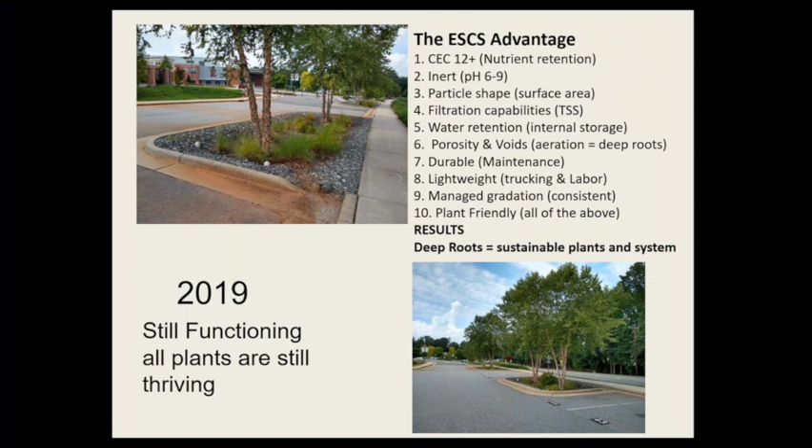For trucking and labor, you can put an awful lot in a truck. If you have to travel long distance, that's a big money saving. And the managed gradation is consistent. You don't go into a sand pit and have a totally different gradation with this. It's a manufactured product and it's very plant friendly, which covers all of the above, obviously. Deep roots equals sustainable plants and systems.

The last thing we'll discuss is industrial stormwater. It's a totally different animal. You're dealing with some hazardous waste, perhaps. You're dealing with oil and grease, fuels, things that you don't normally want to end up in a creek.

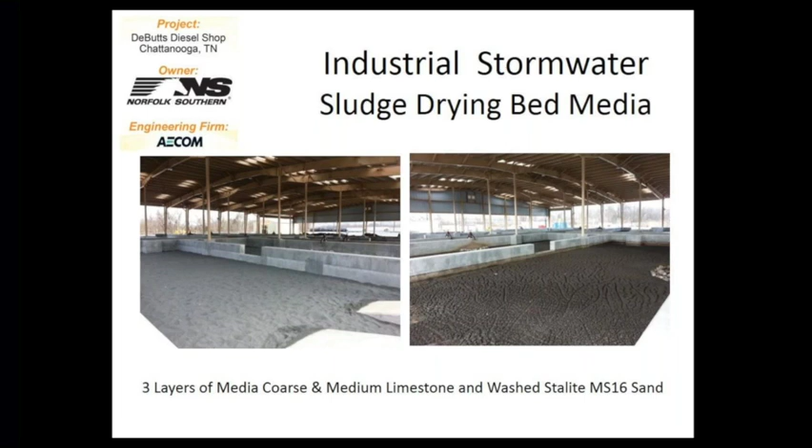This particular project is in Chattanooga at the Norfolk Southern Yard, maintenance yard, and they created a level area to take off all the runoff from the shops where they clean machinery, work on engines, and clean out cars, and that runs into this drying bed. It's covered, it's concrete. They fill it with the material without the pine bark fines because we're not growing plants in this thing, we're just basically creating the filter cake. So you've got 3 layers of medium coarse and medium limestone and washed Stalite, which is the expanded slate. And the MS16 is basically the C33 size, the C33 on a normal sand.

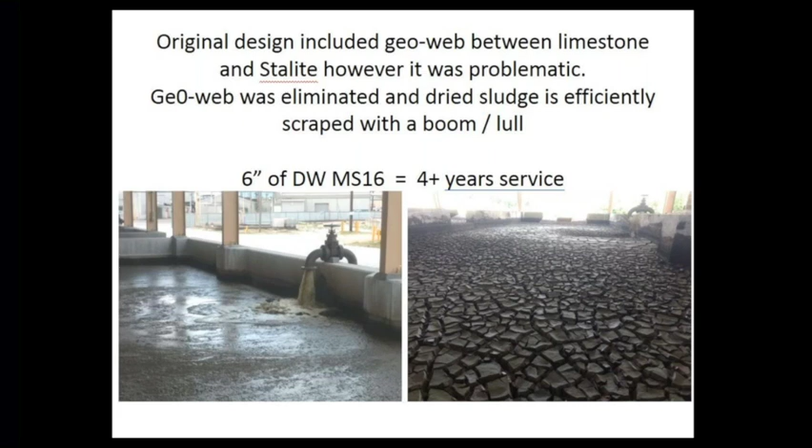Now you can see the effluent comes in, it's filthy. You don't want to be swimming in that. And you can see when it dries out, it turns into a filter cake, sort of like a flat at the desert. They just scrape that up, which eliminates the dry sludge effectively. They pick it up, put it into a 55-gallon drum, and send it to a landfill. And the effluent comes back out.

This does not go out into a creek. It looks good. We don't really know the metals content or what's in this, so they do collect that, so it doesn't go into a creek or anything. But it's very efficient and it's consistent. They don't have to replace it very often because, like in the other picture, it's just on the surface. It doesn't fall—all that gunk does not get down into the main filter.